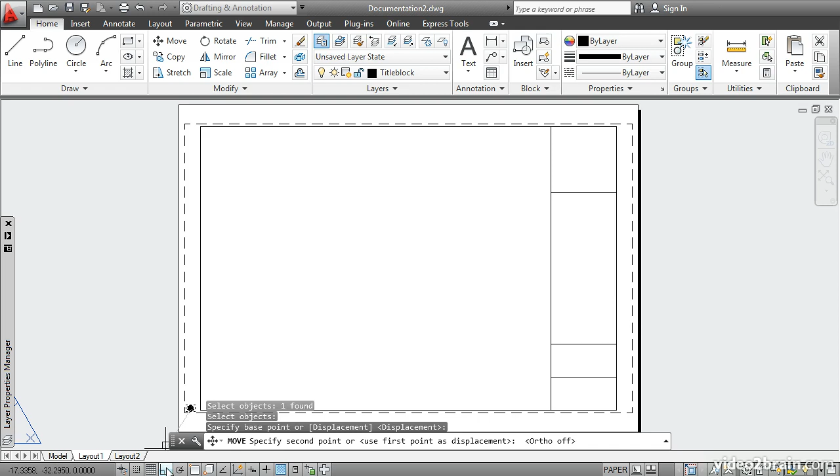Let's move this viewport into the title block area. The viewport can be treated just like a rectangle. Select the viewport rectangle and move it in. Turn off ortho if necessary and move it in to the lower left-hand corner of the title block space. Select it to activate its grips. Click this upper right grip and move it way up here to some arbitrary point.

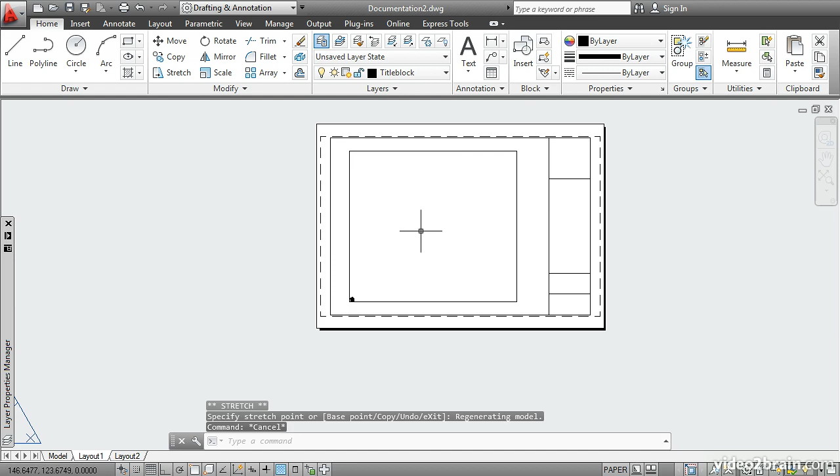Deselect by pressing Escape, and then double-click inside the viewport to activate it. What you're looking at now is called floating model space. This is the drawing area that is normally black on the Model tab. I can go ahead and pan and zoom to zoom into this drawing.

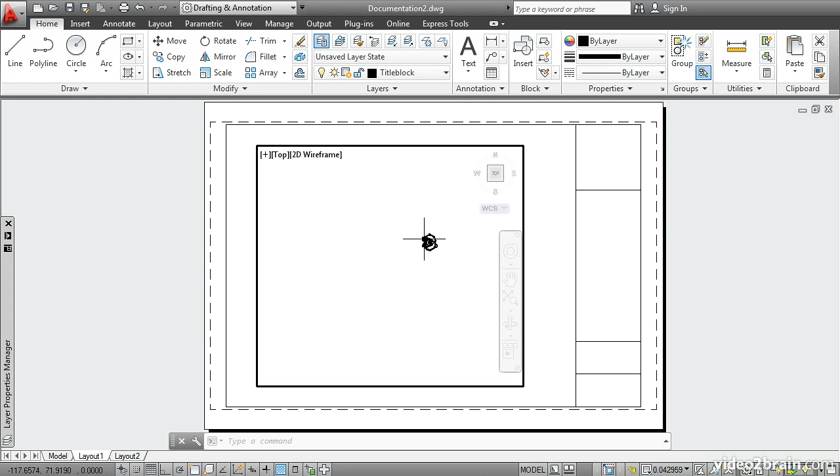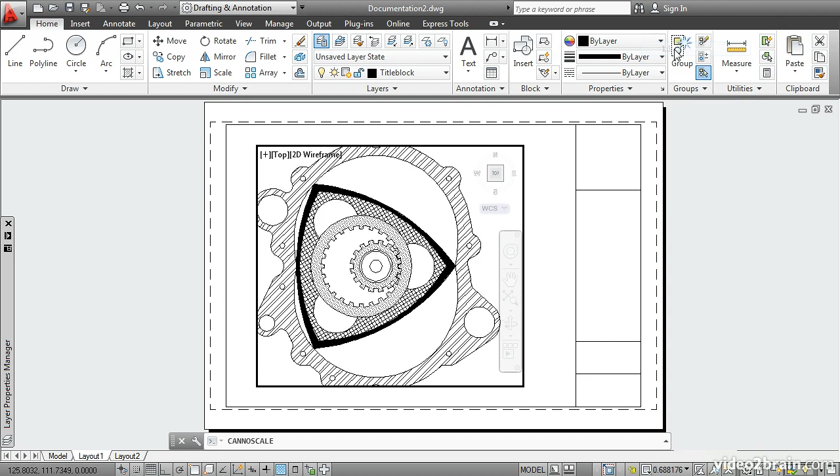Because I can do that, you might wonder, how am I going to scale this in relation to this sheet? And that is done down here with this pop-up menu. It's called Viewport Scale. Let's choose a scale of 1:1. Evidently, that's too large to fit on this particular sheet of paper. So let's choose a different scale. How about 1:2? That looks like it fits.

So now I'll double-click outside the viewport to switch back into paper space. This is where I can actually select the viewport frame itself and manipulate it. In this case, I'll make it smaller so that it more closely borders the geometry of the drawing. I'll press Escape to deselect. Now if I go in here and double-click, I activate model space within this layout.

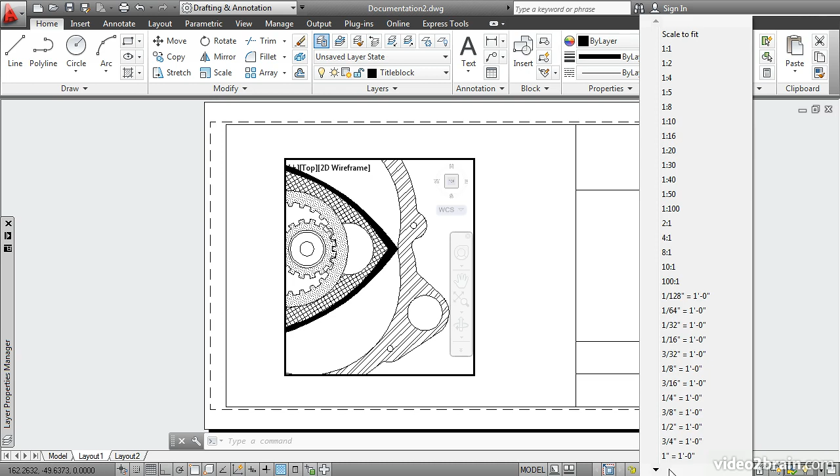I have to be very careful when I'm in this viewport because if I pan or zoom, I'll change the graphic scale down here. I want to make sure that the viewport scale says 1:2, and I want to make sure that I can see everything on the drawing. So I'll go back, double-click over here to switch back into paper space.

I recommend that you lock your viewport after you've chosen a viewport scale for it and arranged it as we've already done here. To do that, select the viewport frame while you're in paper space, right-click, and choose Display Locked. Yes.

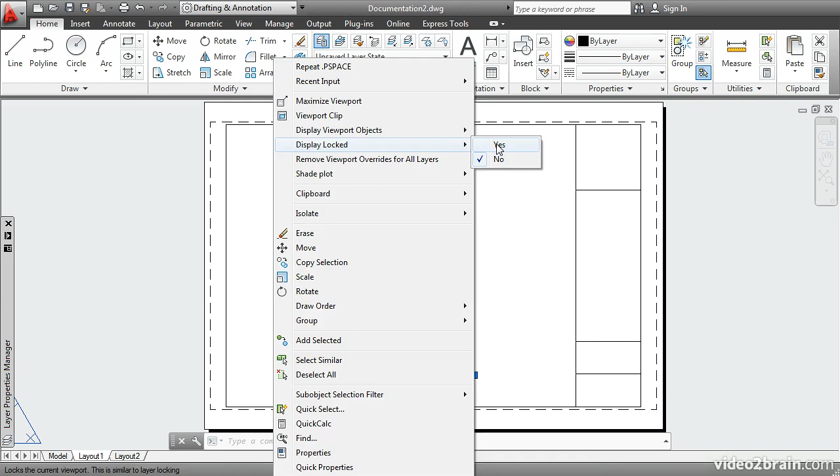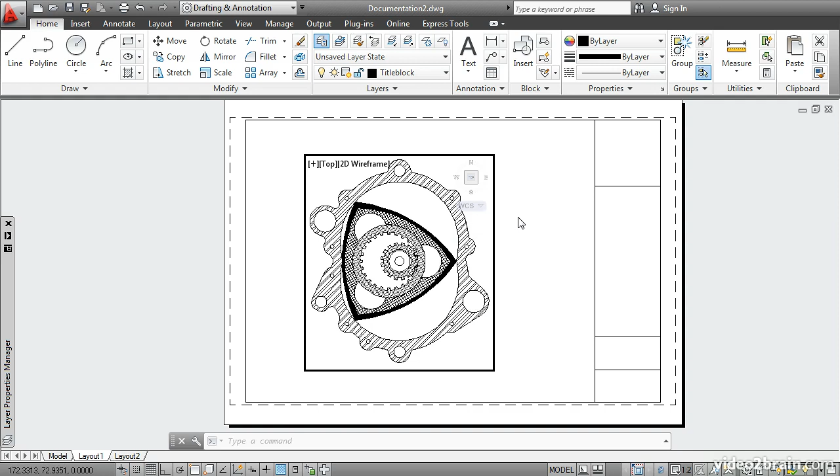Now let's look at the difference. If I double-click to go into model space and then try to pan or zoom, it doesn't let me do that within the viewport. It's panning and zooming all of paper space. That's the effect of locking a viewport. Double-click out here to go back into paper space, and then move the viewport over so that we have some room over here in this area of the title block for another viewport.

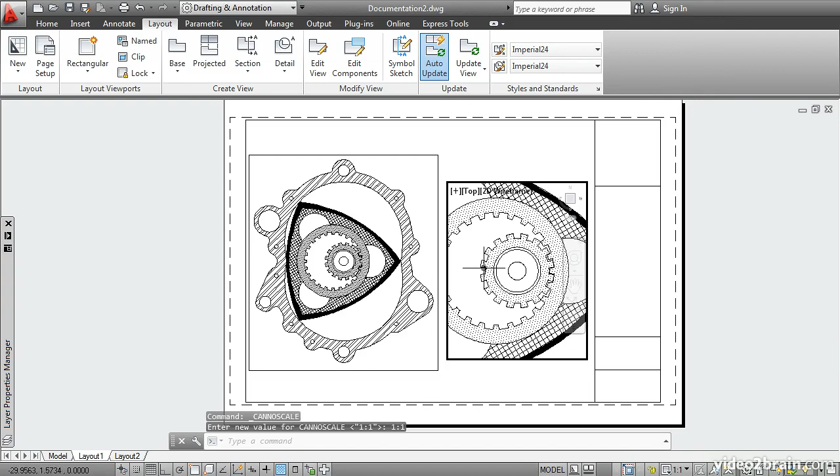Next, click the Layout tab. Click Rectangular here in the Layout Viewports panel and select Rectangular. Click 2 points as if you're just drawing a rectangle, but you're actually drawing another viewport. Double-click inside of it to go into model space, and then choose a different viewport scale for this viewport. Let's try 1:1. This will allow us to focus in on a detail of the drawing.

I'll pan, and I accidentally rotated the mouse wheel there, and I changed the scale down here. I have to be very careful. I'll choose 1:1 again, and you can see it says 1:1 as long as I'm in that scale. Oops, it happened again. I'll switch to 1:1, and this time I'll double-click outside to go back into paper space.

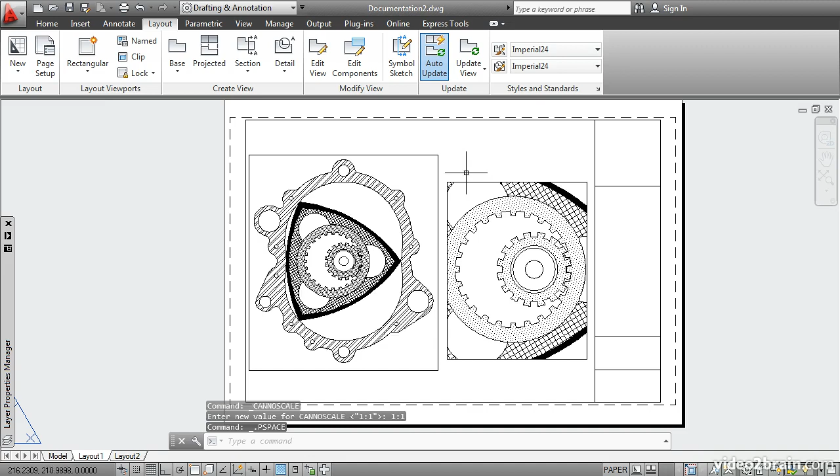I'll zoom in a bit, select the viewport itself, and make it a bit wider. I want to focus in on this large gear. I'll bring the viewport frame in to crop all of the geometry around this circle. Okay, I'll press Escape to deselect. Double-click inside, and I'll just verify that indeed the scale is 1:1.

And at this point, I should lock this viewport so that I don't accidentally mess up the scale. I'll go back into paper space by double-clicking, select the viewport, right-click, and say Display Locked, Yes. Now, in this particular viewport, I don't want to see these objects outside of the gears. I can hide those using the Viewport Freeze feature of Layers.

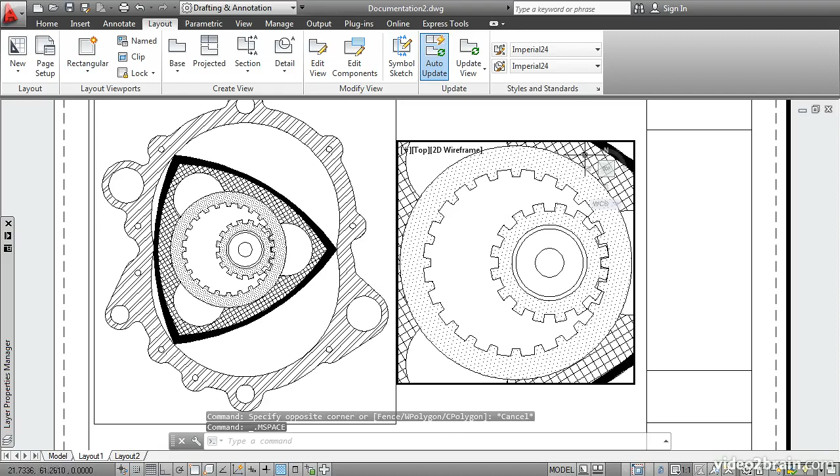Double-click inside this viewport, click on one of these objects here, and you can go to the Home tab to see which layer it's on. This is on the hatch layer. Okay, let's keep that in mind. Press Escape and select this circle. It's on layer 3. Okay, so let's freeze layer 3 and the hatch layer. Go over to the Layer Properties Manager.

If you freeze the hatch layer, it freezes in all viewports, and that's not what we want, because I want to see it over here, but not over here. So instead of freezing the layer, what you do is you scroll over and you freeze it here in this column, Viewport Freeze. It only disappears in the selected viewport. This column would be used if you want to freeze the layer in the current viewport and all new viewports that you create in the future.

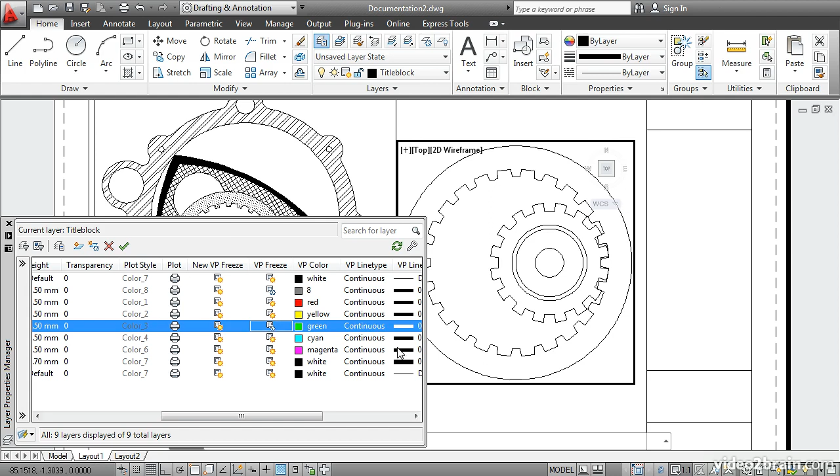I'll also freeze layer 3 in this particular viewport by clicking this icon. There we go. Now I'll double-click outside the viewport to return to paper space. Finally, let's turn off the viewport layer itself to hide these viewport frames. That will hide the viewport frame in paper space for both viewports.

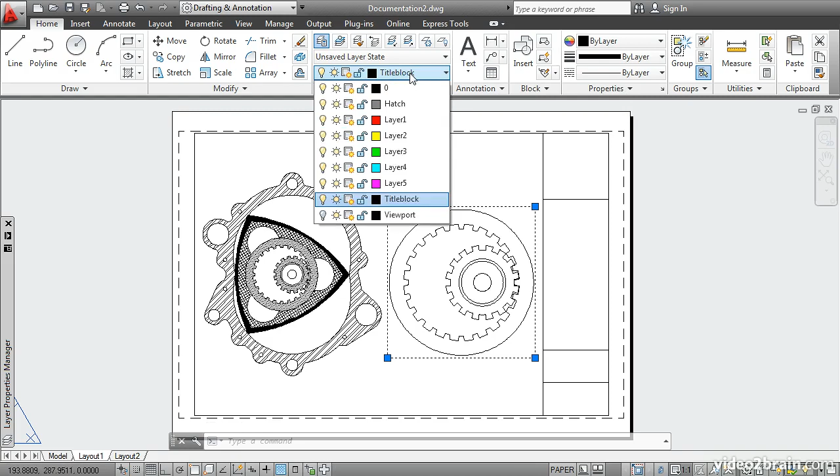Now over here, this one doesn't look hidden. It's because this viewport was mistakenly drawn on the title block layer. I'll reassign that to the viewport layer, and it warns us that we've moved it to an off or frozen layer. Well, that was my intent, so I'll click Close.

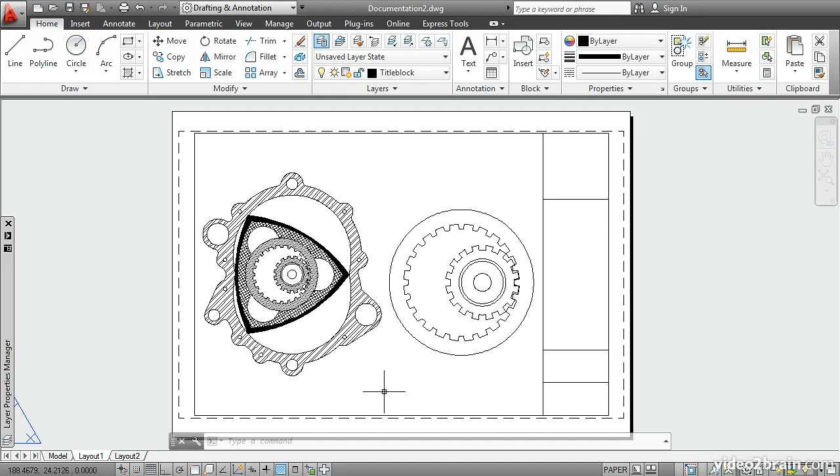So now we have two drawings of the same information at different scales, and we've controlled which layers are visible by freezing selected layers in a particular viewport.